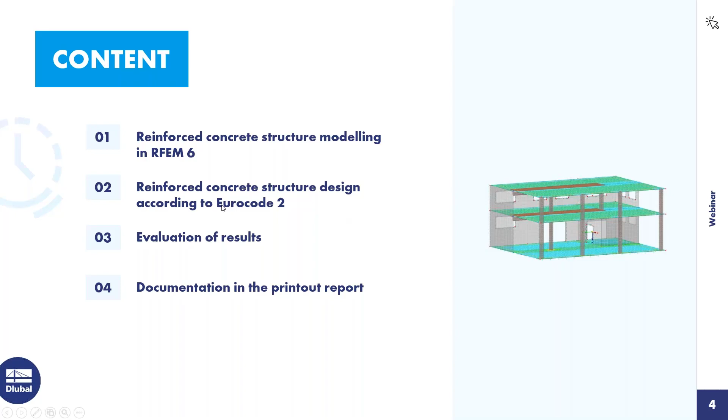The reinforced concrete structures are designed according to the Eurocode. I will design also a T-section here under the slab. Then I will evaluate the results. I will discuss the results, will show how we can work with the graphical displaying of the results, and also how we can print the results into the printout report and document our calculation. I go now directly into the RFEM structure.

The structure was already defined from the members and the slabs. I only give you a short overview about the used objects. The basics of the reinforced concrete design, and also the design of members, the reinforcement, definition of members, also the design by using the member representatives if we have more similar members, was shown in the first webinar for reinforced concrete structures in November of last year. There the basic steps are shown, how you can define the properties and the settings, and my colleague Caroline will write the link into the chat where you can find this webinar. It is very good for the beginning.

So therefore, I will go today in the design especially to things which weren't shown in the first webinar. The punching design was not so detailed, and also not the rib design. The structure is a concrete structure with C30/37, and I use sections for the columns with 450 by 450 millimeters, and I have already prepared a section for the T-section, which is named in our program as rib. In the following description, I will always use the name rib for the T-section.

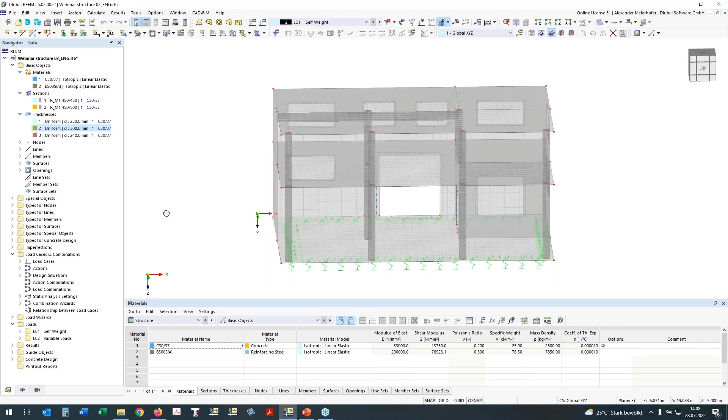The building now has elastic springs, so elastic support, and this will also have an influence later in the settings for the deflection design, which I will show you.

At first, I want to deal with the nodes where we have the connection between the columns and the slab. Here we should place mesh refinements to have a better FE mesh. For this, I go to the data navigator, where by double click I can open a new nodal mesh refinement, and give my settings: radius 1 meter, and the inner target FE length is 15 centimeters. It comes from the dimension of the cross section of the columns.

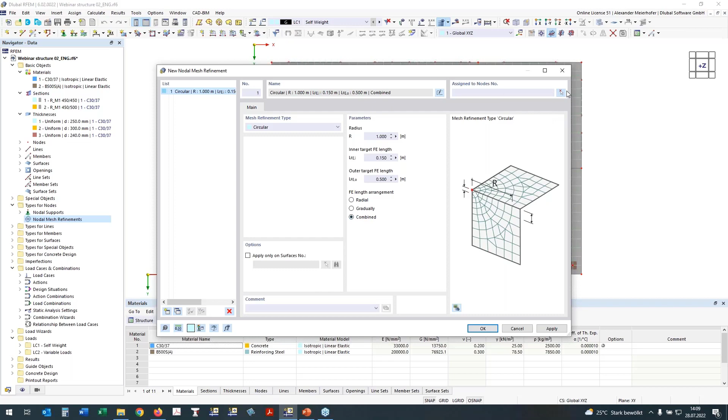For the length arrangement, I use the combined approach, and now I will assign the nodes with two rectangles where I want to have the refinement. And if we look in the isometric view, we will see I have caught them, and everywhere is now my mesh refinement.

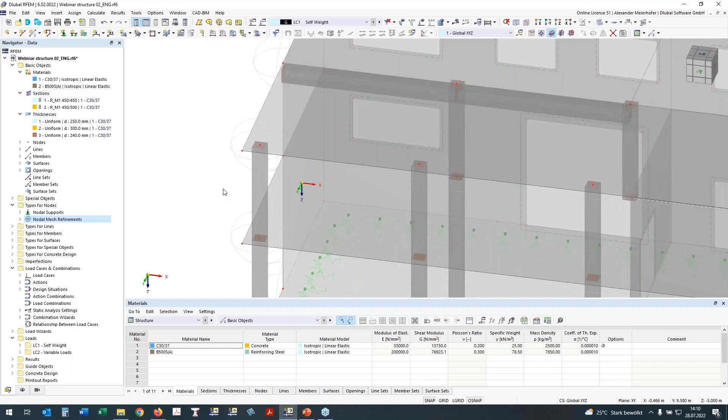On these nodes, from the column and the slab, we also have singularities, and how we can deal with these singularities in the concrete design is described in a very good knowledge base article on our website, which I want to

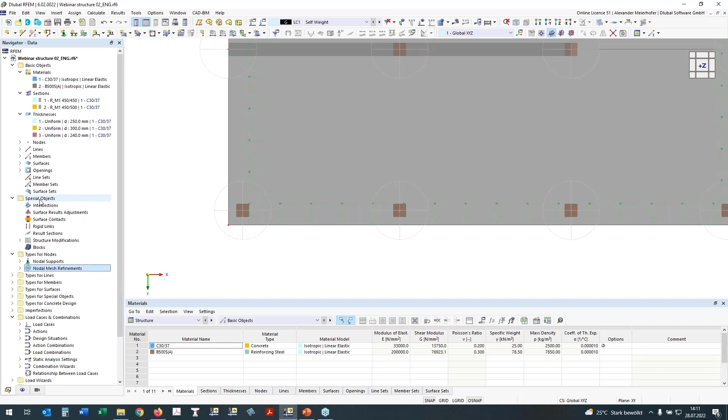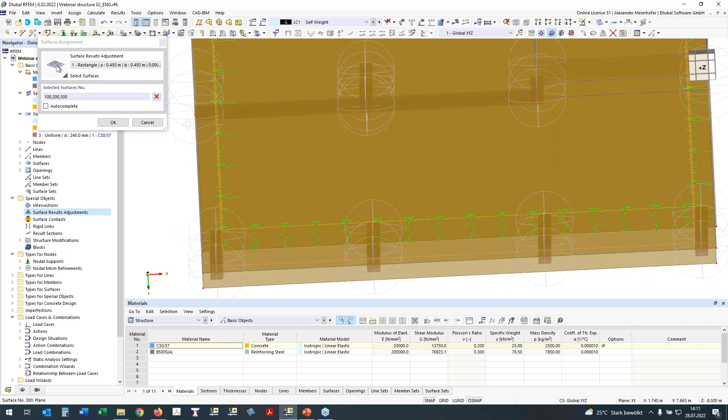By double click, I can open the dialog, and now we can define a new rectangle result adjustment with the dimension of our columns. I want to have it on all 3 surfaces, and you see the numbers of my surfaces were chosen so that I know where they are placed. So 100 is the slab on grade, 200 the slab over the ground floor, and 300 is the slab over the first floor. If I press OK, I have already assigned the surfaces,

and now I have to define the center of my adjustment. Here by copy, I can simply copy this adjustment and set only the new center of the result adjustments, and then I will have it in all areas.

I make one new and want to define it also over the wall. The width is 25 centimeters, and I defined a little bit bigger area and defined it here because here is a wall. Define it also in this area.

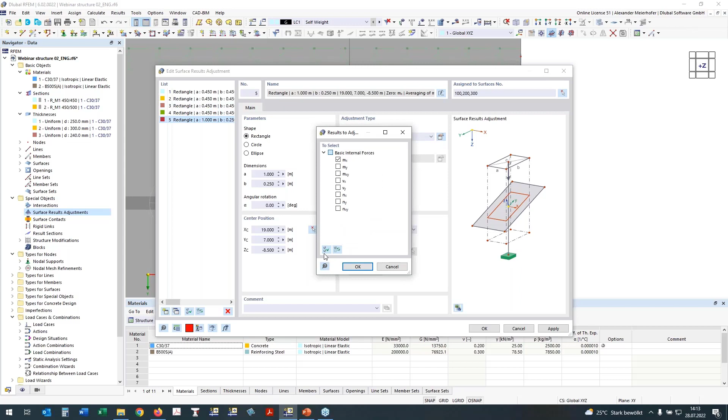I made one mistake. I forgot to define the adjustment type. I want to set it to 0, and I want to set all inner forces to 0, and this should be done for all defined adjustments. So I was one step too fast before. This should be done before I copy it, and then it is always in the right setting. By OK, it will be placed.

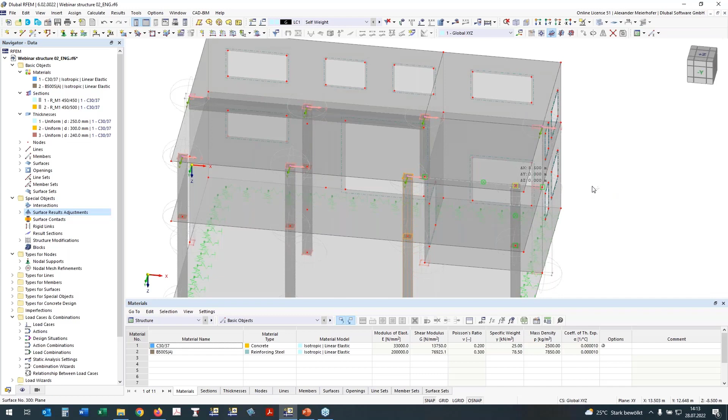We can see it, and we can also work here by drag and drop. We copy it by drag and drop. If we press the Control key, you can place it by drag and drop, and it's very simple to work with. So this is then for the connection of the columns to the slab.

One additional setting for the slab is necessary. I want to have hinges over the length of the supported line. The definition is very simple. We double click on the surfaces, and the edit surface dialog will open. Activate hinges, and in hinges I click to select lines, press Control, and then I have selected 3 lines where I want to have hinges, and the hinge type is by default already the moment hinge, and I will put it to all lines, line hinge number 1.

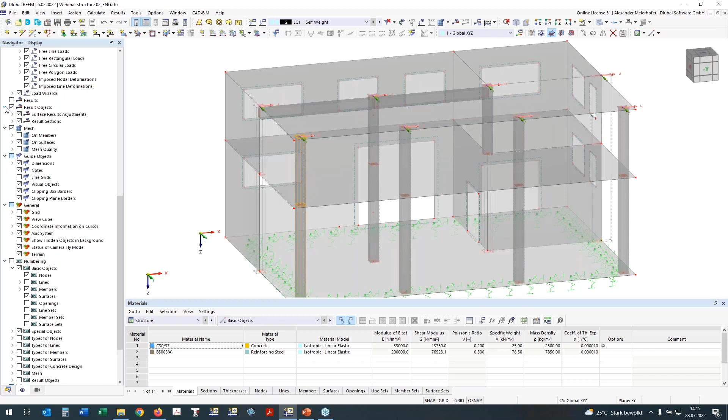Okay, it's ready now, and if we take a look at our refinement, it is placed everywhere, and also the adjustment. In the display navigator, we can deactivate the mesh refinements because I don't need them anymore for the work now, and the graphic is then clearer for the presentation. Display properties are placed now under the results objects, and then it's also deactivated.

As the next step, I will define the rib for the slab over the ground floor. For this, I will hide the first floor by selection, and now I have the first floor.

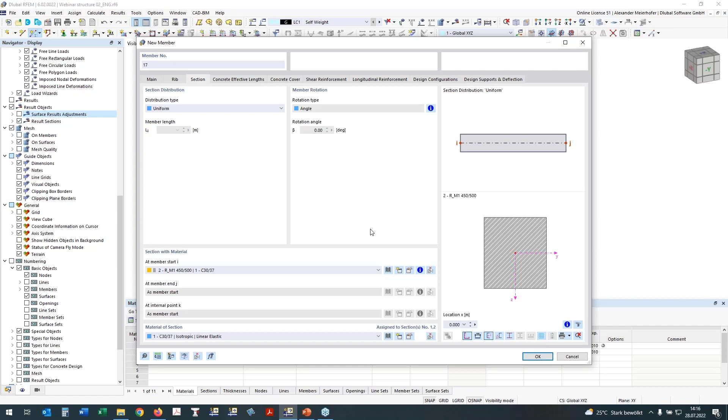By using new member, I can define now section rib by selection of the section number 2, which should be used for the web. The web should be 500 millimeter high. I can define now the rib from here to here, and also from here to here.

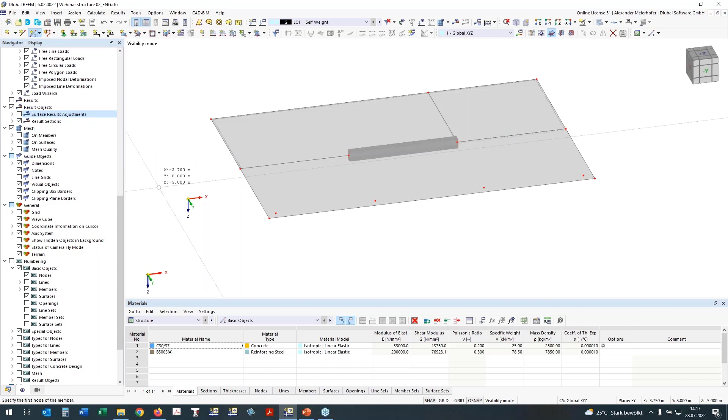Oh, something was wrong. Okay, I do it again. I know what was the topic. I will make the selection new and select only the slab which I want to show. So the new member is the same section, section number 2, and then from here to here. By escape, I come to another point.

So if we take a look to the complete view, we see here in the first part, I took care about the rib. I go now in the rib section, and this is a very new feature that we can now also define more sections or segments during one length of the members. This is completely new developed. I use here the calculation of the integration width according to Eurocode 2, and the splitting of the segments can be done in 15% and 85% and also 100%. And we see now we have more integration points.

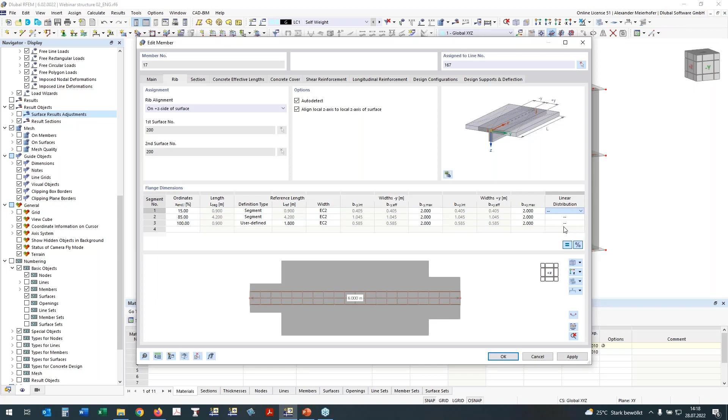Here we have an inner support, and it means we have to consider also for the calculation of the integration width the length of the neighbored span length. So I have to define here 180, and I have now my different integration width. We have here also a new option that we can make here a linear distribution of the integration width, and now we have defined the rib for the design.

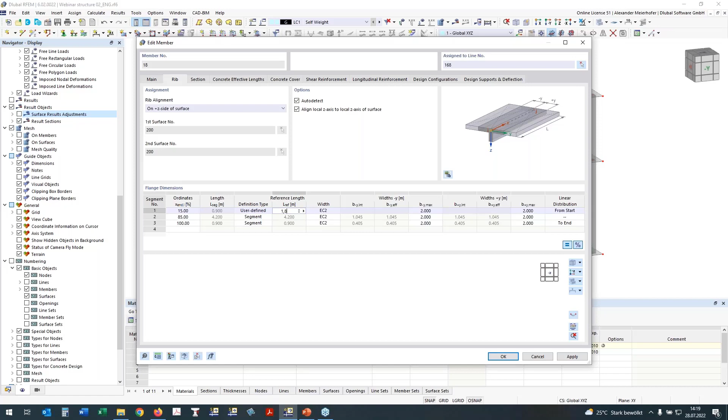For the second member, I use here the copy of object selections. It's a very nice tool. If I click here, we have here really copied all inputs. It's a rib, and the only thing which I have to change is now that the end field is related to the segment, and this is for the user-defined 1.80. And then the inputs for the static analysis are ready. And now I do it again what I did before.

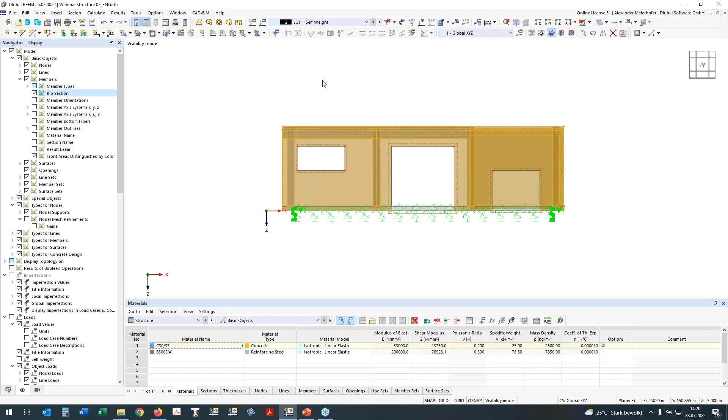And a very nice feature from RFEM 6 is now that we can show the rib section also in the graphic, and we see that the integration width is also shown here in our main graphic of RFEM. Okay, now I will select again my slab here, and will continue with the definition of the design properties.

The design properties for the reinforced concrete calculation are activated by double click. I come into the surface dialog, and I continue with the concrete cover. The concrete exposure durability is defined by the exposure class, which is default to XC1. This is what I leave. It's okay. The design direction of the reinforcement is the first direction goes in X. This is also default, which I will not change.

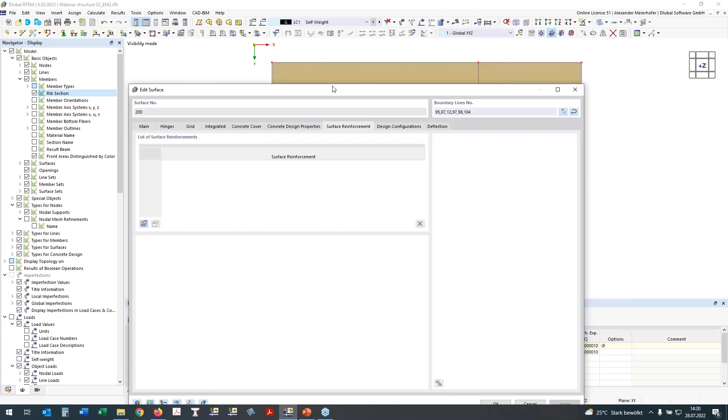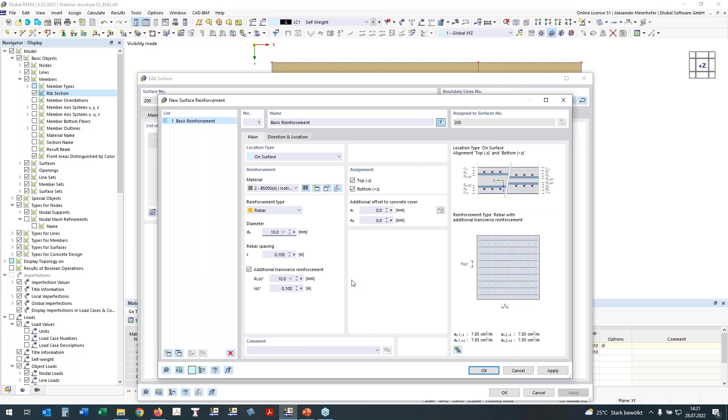And here is one important topic. In the surface, I need a surface reinforcement for the diameters so that I will know the statical depth for the calculation. I just design a type of basic reinforcement, which will be in both directions, the diameter 10 with a distance also 10 centimeters, and by pressing OK it will be then assigned to the surface. Here are listed design configurations, which I don't discuss today. This was in the first webinar very detailed. I will later take a look to the serviceability configuration.

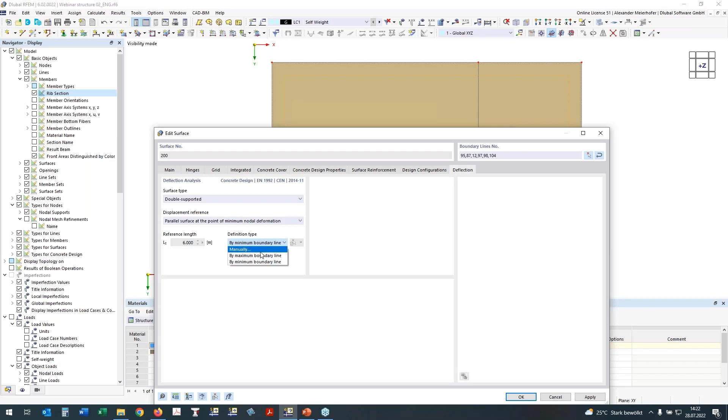But here's one very important thing, which I mentioned before at the beginning. We have an elastic supported structure. Therefore, it is an advantage to relate the deflection to an also deformed slab or plane. And here I use the parallel moved slab as a reference plane for the deformation, and as reference length I will define it manually by 2 points and say my reference length for the maximum allowed deflection is from here to here. It's about 5.5 meters. By OK, I have defined all properties for the reinforcement design.

We can also take a look to the graphic. If we go to the types of concrete, we see here we have surface reinforcement longitudinal, and if we activate it, we see that the reinforcement is defined in this area.

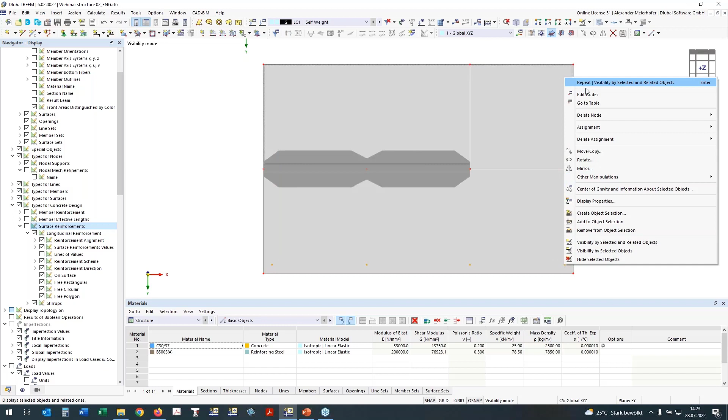Okay, I said that I will take care about the punching design of the nodes which are here. So like for all objects, we have to select it and go into the nodes or object dialog, edit nodes, and activate the design properties. Here it's only important for now that we have to check for design of the punching, and then we will have here also assigned the punching in the add-on concrete.

I will go now to the definition of the ribs. Here we need also reinforcement. I want to design not two members, I want to design it with a set of members. So I select both by pressing the Control key, and create a new set of members.

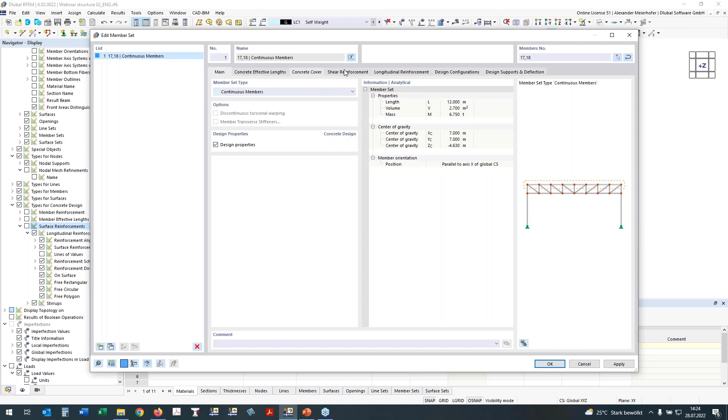And here we have now the new set of members, and I can say design properties for this set of members. We see that all inputs for the design properties are now open. It means the concrete cover is now shown, and here we have also the same durability which we already used for the slab, XC1, and the shear reinforcement.

I will change the distance to 50 centimeters, and if we take a look in another view, then we see here the cross sections, or the variable cross section of the rib, is already shown here, and also there is the reinforcement. I will go to the longitudinal reinforcement. We see here the reinforcement which we have defined for the slab design is already placed.

If we go more, we will see it. It is activated by this icon. If somebody doesn't want it, you can deactivate it or let it. I want it, so I will let it here. But I will define now a different distribution of the longitudinal reinforcement.

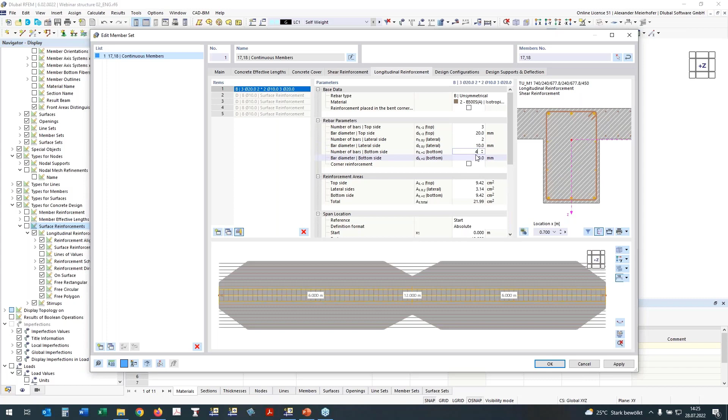I want to have it unsymmetrical here in the web. So on the top side I will define here these three rebars with diameter 20, but a lateral reinforcement also from 2 diameter 10. And on the bottom side, I want to have 4 diameter 20. And it will be directly updated here in the graphic.

Here is also the 3D graphic of the reinforcement, which can be used for control of the inputs. Hopefully it will be shown. Here we see a small reinforcement drawing, also the used shear reinforcement, which can be activated or deactivated. It's nice for control and for printing. Okay, I can close it.

Design configuration is the same like for surfaces in all parts. And now is one important tab. We have to define now the deflection properties or conditions.

I want to check it only in the deflection in Z direction for the gravity loads, of course. And here is the point: my reference is then the deformed segment ends. This is now also the point which I mentioned.

We have an elastically supported structure, so it means also the supported ends will be a little bit displaced in Z, and this I don't want to have in the design check for the deflection.

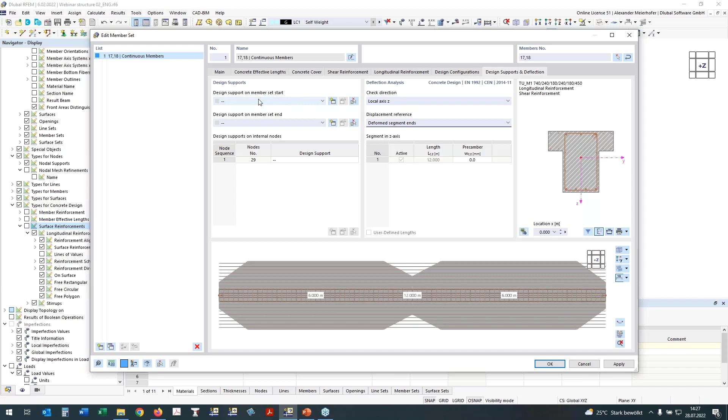Important is that I generate on the ends or in the middle some design supports. We have here design supports in Z direction, and our wall is 250 millimeters. It's a monolithic connection, and will be used for the walls at the end and the start.

I directly copy it and use here also the width for the columns, which are inner supports, and here I have to deactivate inner supports and press OK, and then it will be placed directly at the beginning.

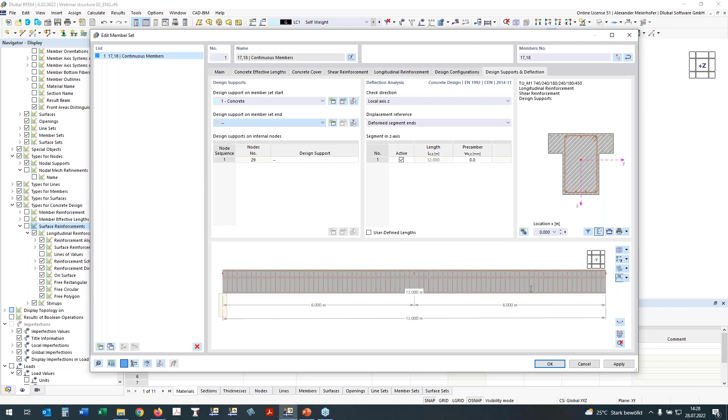I will change here the view to see it. Here we have the first one, and at the end it will be also placed, with the 250 millimeters width. And in the center I will also use the design support, but it is now for the column, and it's bigger, it's 450 millimeters.

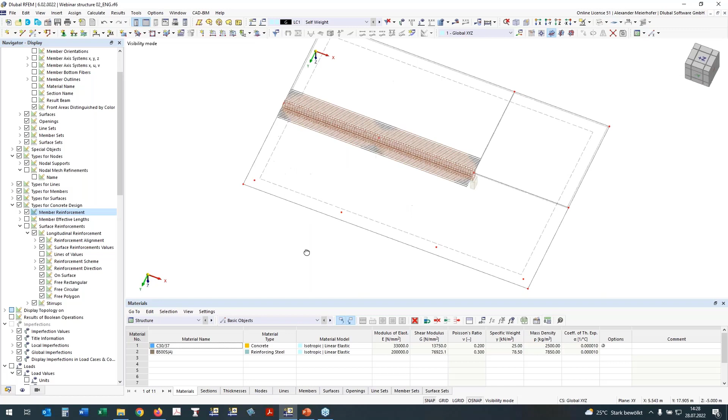And we see here now for deflection we have some lengths, 6 meters and 6 meters, and if we have some pre-camber we could define it here, but in this case I don't have it. Okay, we can confirm the inputs, and also we can check the member reinforcement and display it, and see that everything is okay.

Before I start with the calculation, I will make now new object selections. I have to make it a little bit bigger. Create new object selection, and the advantage of this object selection you will see immediately after closing the dialog.

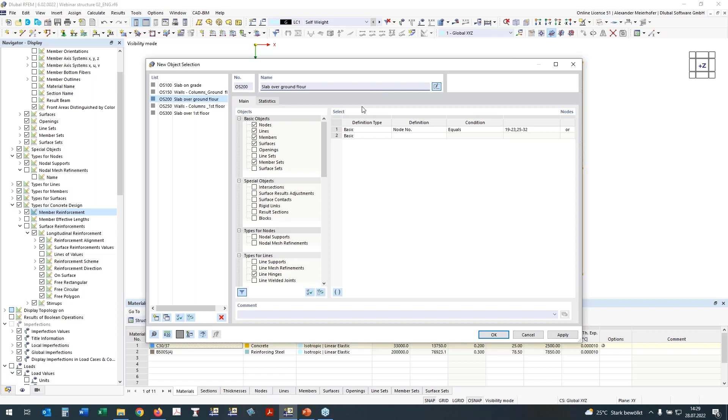This is my slab over the ground floor, and I press OK. And now we have here in the guide objects, the object selections, and you see I have already done a little bit more, but the new one is the object selection number 200.

And if I go now to the concrete add-on, I can use the object selections directly to define all objects which are there in the add-on. It is then replaced, and only the selected object is shown, and it is very good to organize the work.

Before I start the concrete design, one hint where you have to check in the basic settings: you have to activate the concrete add-on in the design add-ons, and in the standards you have to define the used standard for reinforced concrete design.

Here I will use Eurocode 2 with the original rules, so without national annexes.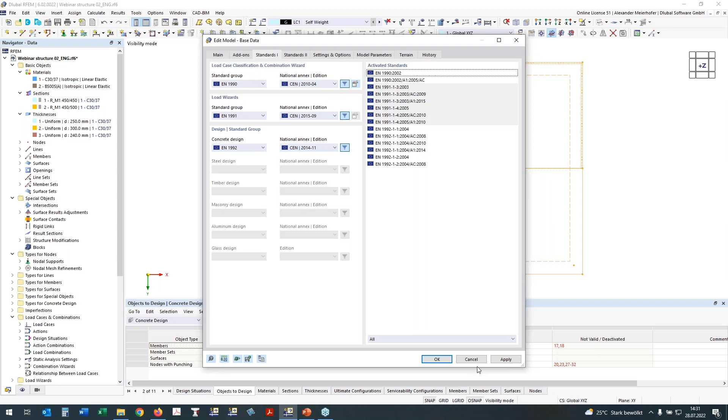If we have the loads, this is also one additional hint. I have defined a load case, self-weight and variable loads. We have to define the action category there - it's for the office. And in the base data, I have the combination group and the combination wizard defined.

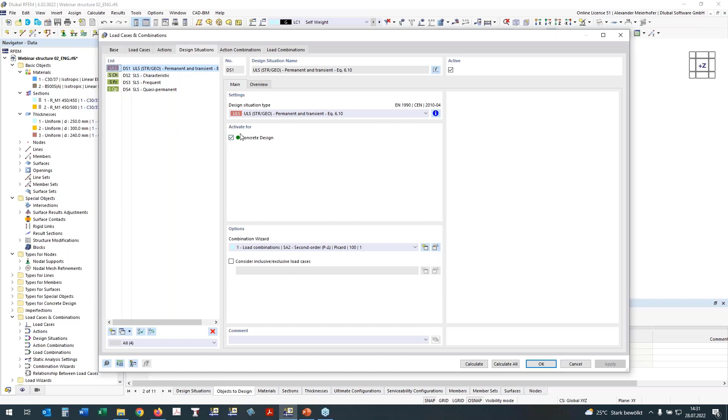In the design situation will be automatically listed the serviceability and ultimate limit state design situations, and here will be the list of all activated design add-ons. Here we work only for concrete design, so all load cases related to this design situation will be calculated.

I can multi-select it, and what I have to do is select my combination wizard. The combination wizard is defined in this way that we have to generate load combinations, and the static analysis should be done by first order and geometrically linear.

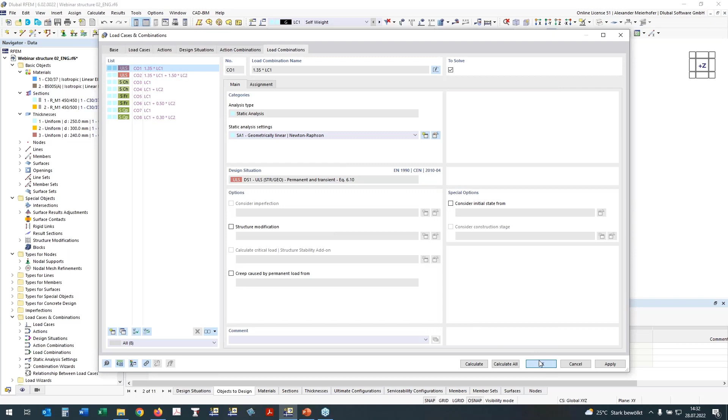If we go to the register load combination, this combination was generated automatically and will also be used in the design of the reinforcement.

Now I go back to the add-on concrete. We have here already designed the object selections. Material and sections are only listed for control. Here are the ultimate configurations or settings which should be used for the ultimate limit state.

Here we have the serviceability state. I will take a look in the serviceability state configuration, and here we have the stress check and the crack analysis, which should be done by finding automatically the limit value for the crack width, according to the defined exposure class. We have XC1, so therefore I expect in the calculation 0.4.

With the deflection calculation, we have this L, the reference length, divided by 250. And here is the crack state detection for the serviceability.

This I want to explain a little bit more, because this is really new, which we released two weeks ago, so I'll take a little more time for it.

The first one is the crack state calculation for each associated load. Each load case or load combination will be considered and calculated for itself.

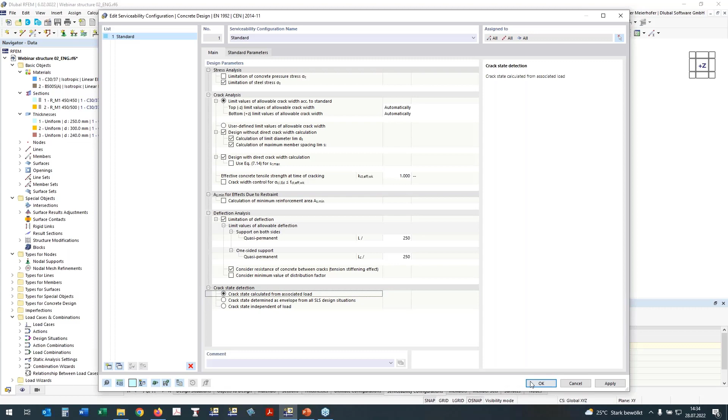I'll add it in the first setting and confirm it. Now I think we can start already the calculation.

Of the statically analyzed design - firstly the mesh will be generated, and as next step the static analysis is done. You see here we can now use more cores of the PC. I have here 4 cores, and there will be 4 calculations parallel. It is very fast.

In the concrete calculation will be done now a pre-calculation of the stiffness, checking if there are cracks or not. Then will be done a second step of finite element calculation, and the deflection will be calculated, and in the last part of the concrete design the cross sections will be designed, and the results will be prepared for display, for the table, and also for the graphic.

Okay, so now we have an overview of what is fulfilled and what not. We have very detailed tables - this work with tables is also shown in the first webinar. Today I want to work more with the graphics.

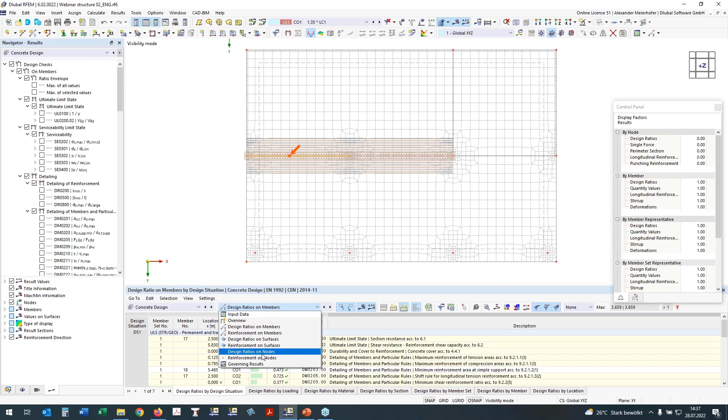The design ratios, one thing more, are also differentiated or sorted by members, by surfaces, and by nodes. Design ratio for nodes is also new - this is the design ratio for the punching proofs, and we see here it's not fulfilled.

I will go now to the graphical results, and firstly we took a look at the results of the surface, and we have here the result values. I want to activate it as only extreme values, and here we have the panel.

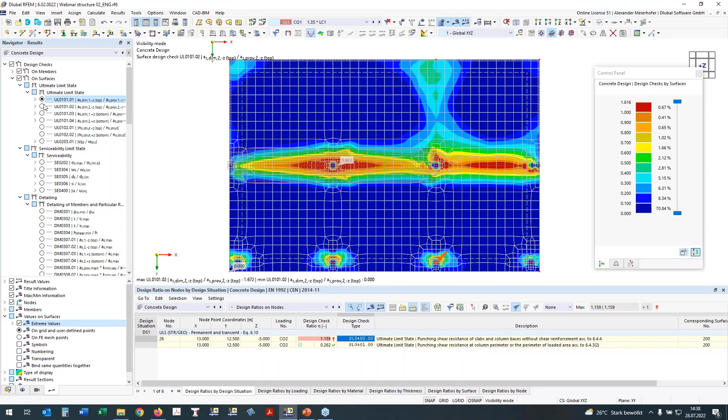So here's a ratio of the defined reinforcement, the ratio between the provided and the needed reinforcement. Here we see in the red areas less reinforcement defined. On the top side, here is also a punching problem. I would expect more reinforcement for the punching design.

If you take a look at the bottom reinforcement in the first direction, we have everything in the green area. The maximum ratio is on this small part, but the main area is under 1. The second direction, on the bottom reinforcement direction 2, is also okay. We have here a ratio of 93%.

The punching proof of these nodes is now shown in the register in the tree for nodes. And if we activate here the vEd for nodes and for vRd,c, we see the corner columns can be designed, but the columns in the center are overloaded, and we need more reinforcement.

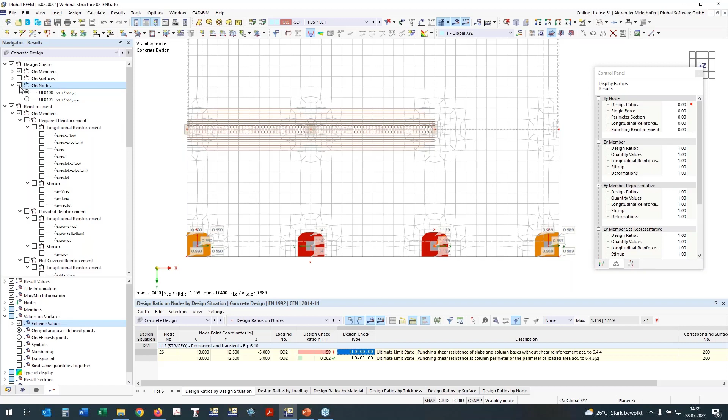To work with it, I will go now to the reinforcement and take a look also at the nodes, and show if we need a required punching reinforcement. Here we see for the required punching reinforcement, we need 0, but we need then longitudinal reinforcement.

In the configuration, I said please calculate the required longitudinal reinforcement to avoid shear reinforcement. And we see if we would place 12 or 13 centimeters, everything would be nice.

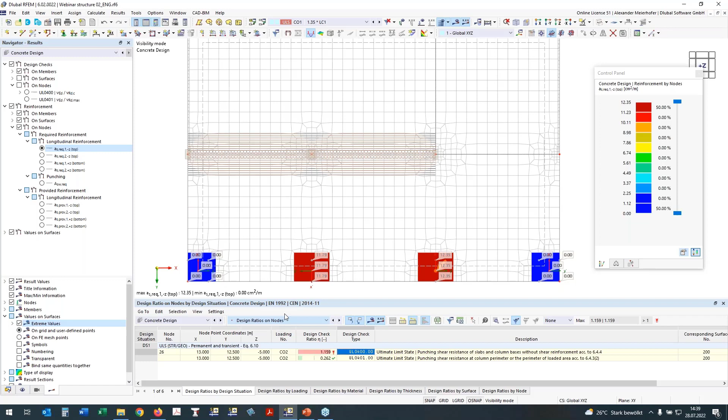I will now define the missing reinforcement. For this, I will go to the global settings of my module add-on. I will deactivate the deletion of my add-on results if I change the reinforcement. Now I can work in the inputs. I deactivate also the mesh so that I have a nice view.

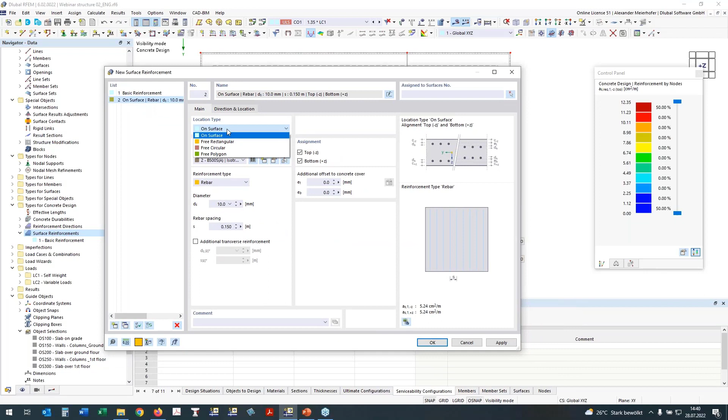And go now in the data navigator to my types for concrete. For types for concrete, we have the surface reinforcement. With new surface reinforcement, I generate a new one, which is a free rectangle area. I assign it to my surface number 2, and the missing area here is for punching, about...

7.8, and I want to have it also only on the top direction. Here is the area which I want to define. I activate my grid to have good coordinates, so I have a grid of 25 centimeters, and this area is already defined.

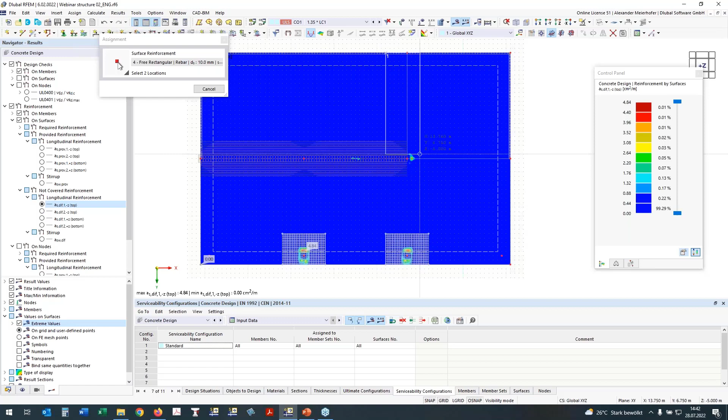For this, I copy the existing one and go in the result navigator, so we can activate the graphic for what we want for surfaces, and say the surfaces have a not covered reinforcement on the top side in this direction. If we take a look here, I will define the same area over my supported line in the first direction, and in the second direction I will do the same area, and take a look what is here. Here I need also some reinforcement, and took it over this length.

It was a little too small, so you can also make it again, and by pressing OK, it is then confirmed, and it is in the structure.

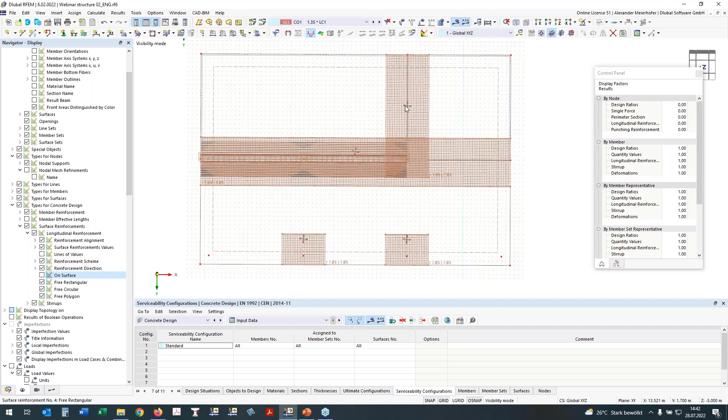For the surface, I can then take a look where is my surface reinforcement. I go to the surface reinforcement and deactivate on surface, and we see what part of reinforcement is defined, and I can also check if the direction is right.

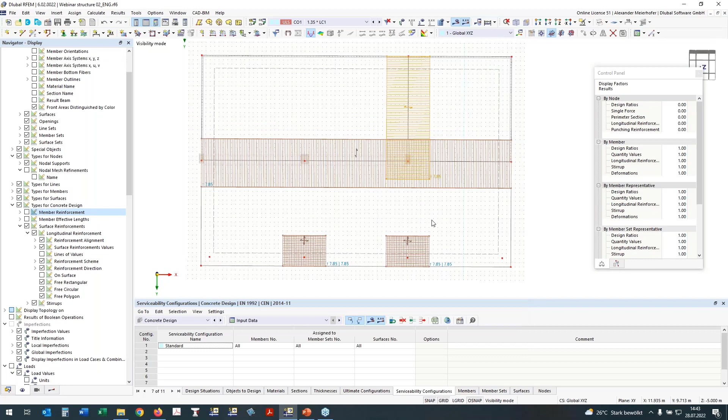Here I have defined one thing too much, so I only want to have one direction, and it's the same here. By OK, we will see I have only one direction. So easy is the definition of this additional reinforcement.

Now I want to take care about the reinforcement in the rib. For this, I select it and change the view, and generate also a new object selection.

which will be then the name should be the T section. Press OK. And here I work now with the design checks on members, and take a look how is my cross-section resistance. We see I'm under 1, so everything is nice.

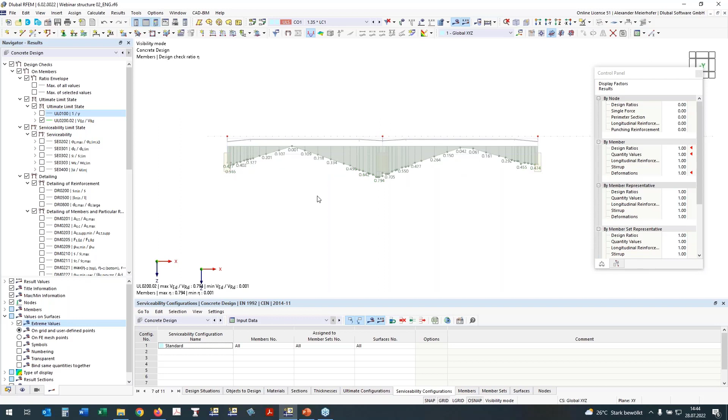If I take a look at the shear reinforcement, the shear proof is also fulfilled, so I need no additional inputs. The serviceability is done in this way, that the stress of the steel is checked.

We can take a look at the crack width, and the crack width is also fulfilled. And now we want to show you the newest release. We have here the additional details in the result navigator. This is available since Monday in the new version, which you can download from the extranet of RFEM 6, and you can activate here also the direct value of the crack width.

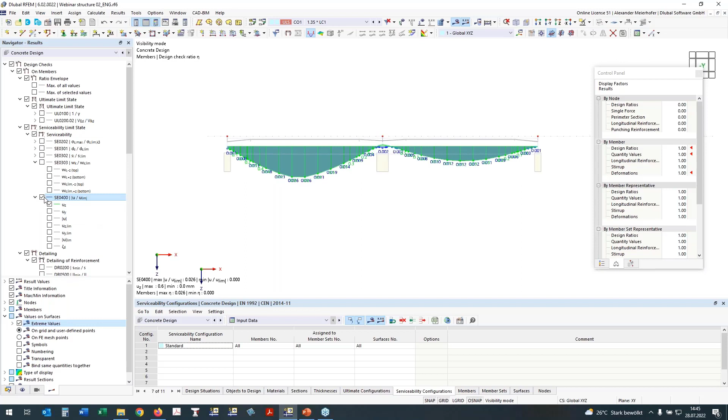For example, we have here only 0.026, and it is also for deflection. The ratio is very small, and the existing deflection is now 0.6, and we see here it is related. Here is the end, it goes to 0, and this comes from the relation to the deformed structure.

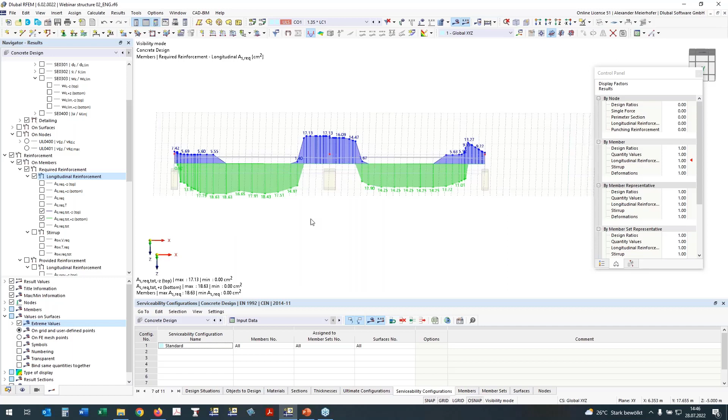Okay, if we take a look at the required reinforcement, it is also here in the table. Required reinforcement of members, As top, As bottom, and we can take a look at it. You have here the graphic, and if we want to print it to the protocol, we have to generate a new protocol, but what we have to consider is that the calculation must, of course, be done again.

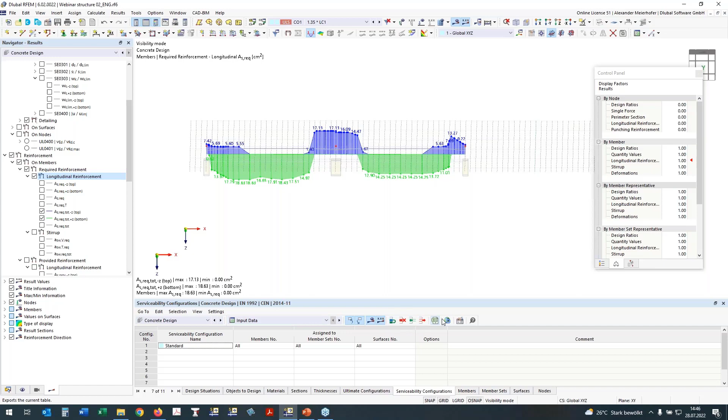We changed the reinforcement. For this, I go to the global settings, activate the deletion of the add-on results, and then it will be updated and deleted. And now I have to start the calculation of the concrete design add-on anew. You can do it also here with this icon and start only the calculation of the add-on. The static analysis results were not deleted because the reinforcement has no influence on them. Now it is only the calculation of the concrete add-on which will be refreshed and done again.

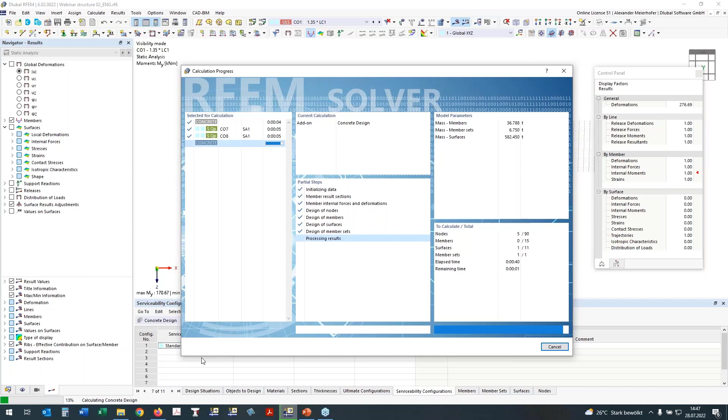And as I said before, this is a two-step calculation. And in the last step, we have here also again a concrete calculation for preparation of the results and the graphic. So now we have the updated results. Design ratio by nodes, by members is okay. And then I will go to the printout report in the navigator and show you how simple it is to work with the printout report.

If we generate a new printout report, I make it here for the concrete results or concrete design and assume that all other documentation of the static analysis will be done separately in another printout report. Today I want to show only the report of the concrete results. So types for members, types for surfaces we don't need, but types for concrete design is necessary for the durability class and the surface reinforcement.

And what I also need is the concrete design, where we have to discuss what is necessary. We see here it is possible to show every tab which is also available in the add-on. It can be printed, but I want to have here only the design ratio by set of members, for nodes and for surfaces. The reinforcement for members should also only be shown by member set, because I design only the member set. The provided reinforcement by member set, the not covered reinforcement I will not show. For the reinforcement by nodes, I leave it as it is, and the design overview will be deactivated.

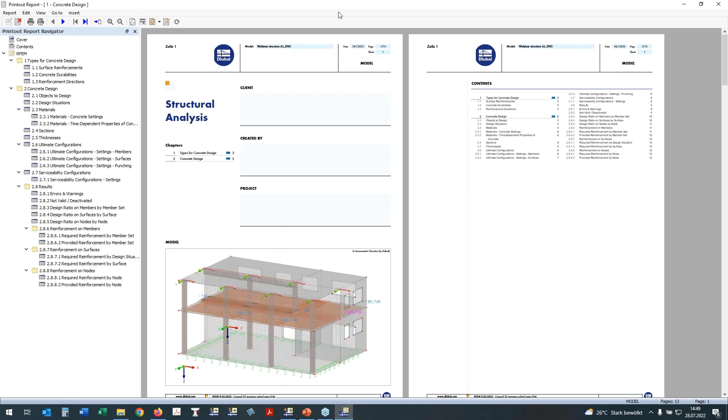By save and show, it will be generated, and the printout report is one of our new developments in RFEM 6. It is completely new. It is a separate instance, which can be used here. It can be opened in parallel to the RFEM calculation, and if we take a look at our results now, result members, then we go through the results of set of members.

Here everything is green; one thing is the crack control, which is overloaded. This we can check later. Detailing is 1.017. It's okay. So from my side, it's okay. For the design ratio of the nodes, the punching design, all ratios are also fulfilled.

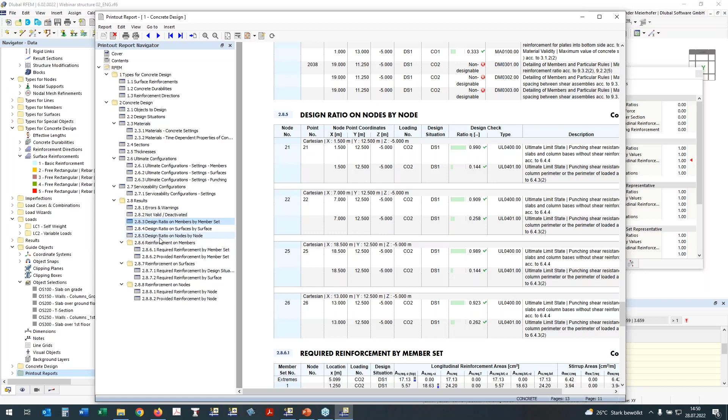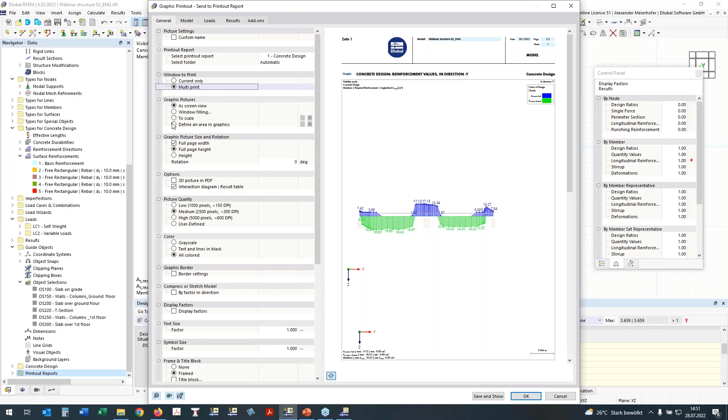And if we go to the required reinforcement by member sets, we will see the list of the required reinforcement. Here I want to show also how we can print the required reinforcement, because in my eyes a picture, a diagram, is better than many tables. Here we can use the printout report, the graphic, and here I want to use the current one. New is also the possibility to define an area in RFEM to print it to the graphic.

Yeah. By 2 points. I will activate the grid. So we can move it, make it a little bit bigger. Okay. And this area will then also be saved and will be used for later.

I make the height a little bit bigger, and the panel should be outside of the graphic, so that it will not be, yes. And with OK, it will be printed to the protocol. If you activate it, you can see it here and make it smaller.

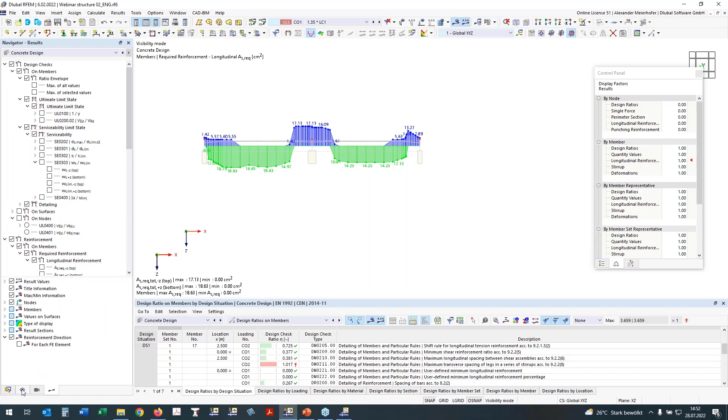Everything is here. And by also using the inputs of the reinforcement, we can now deactivate the design checks on the required reinforcement and activate our member reinforcement longitudinally and use the descriptions. And with descriptions, we can print it directly into the protocol with the same functions.

The same icon will be pressed, so the area is the same. I don't change anything, and with OK, it will be printed. Now I will take care of the slab. For this, I will go to my view navigator, display view navigator, and this is the next advantage of the object selections.

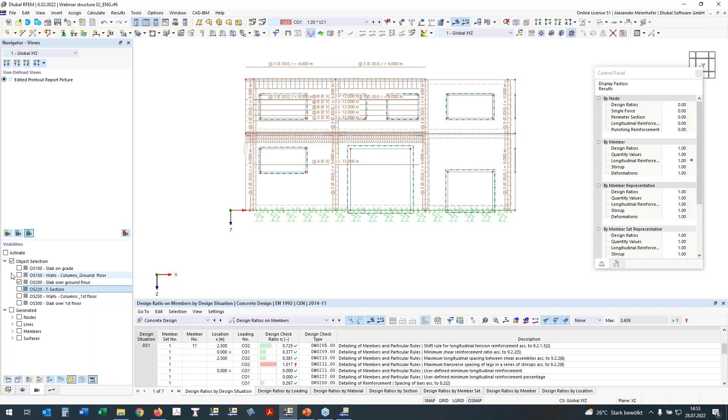If you remember, I have here the slab over the ground floor, and if we look in the Z direction, now everything I selected before is activated, and I can continue with my presentation of the results for the slab. Firstly, I deactivate my member reinforcement, and in the result navigator for the design checks of the surfaces, I go to the ratio of my longitudinal reinforcement on the top side.

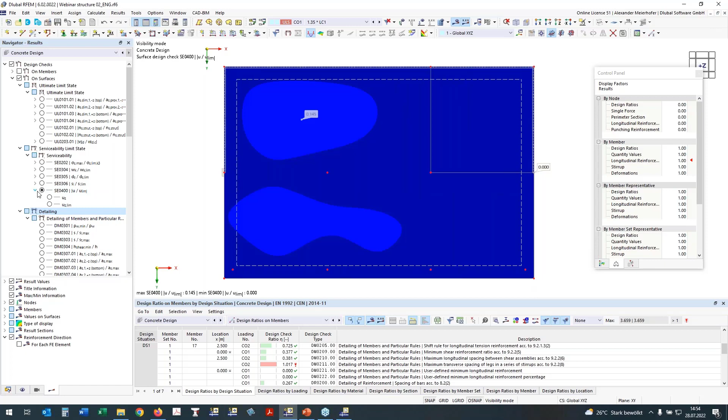It is okay. The bottom was also okay. We take a look at the displacement. So this is a ratio like it is for members, and here is also the deflection. Important for me now is the punching proof, because this was not fulfilled before. We see the ratio is now smaller than one. It's perfect. And we can now also print a documentation of our results.

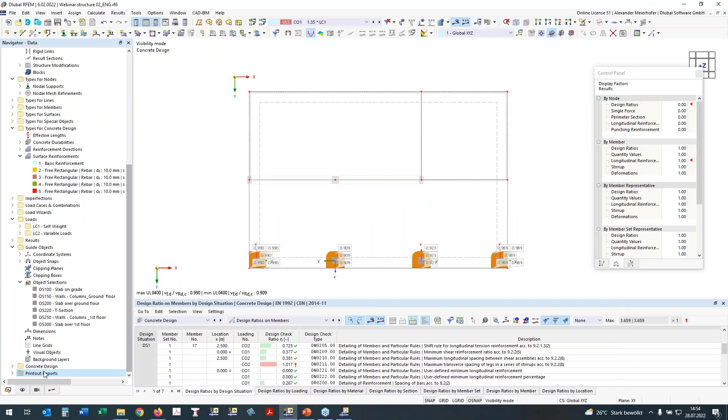I want to use a bigger paper now, like it was done in the documentation. The first printout report is format A4. I want to use a bigger one for the plots. Make a new printout report, and say this is only my annex for plots. And for this, I deactivate all settings here and generate a new page format.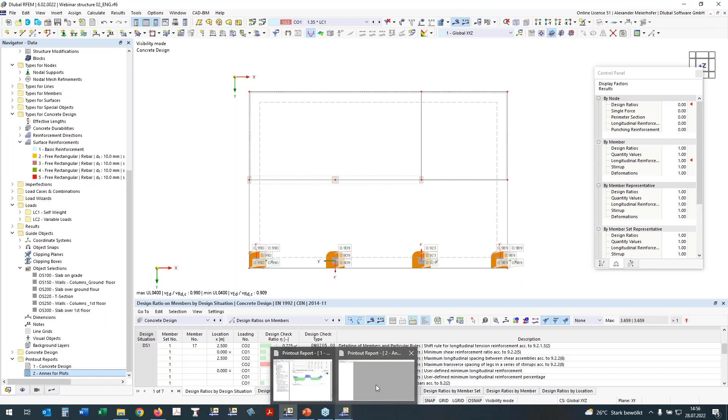For this, I have to select a printer which is able to print bigger pages. So here is my printer, which can print A3, but you need 7 millimeters distance on the bottom side, and I don't need a cover page. With OK, it is saved, and save and show. I will get a new protocol, which is also shown here, but it's empty until now, because I printed no reinforcement or results there.

I want to use the same one again and print the surface here. You see the last view is saved. I want to have a new one. I want to use it in Z, define it in the new area. So from here to here with OK, and with the multi-print, like I did before, I can print all result diagrams which are necessary.

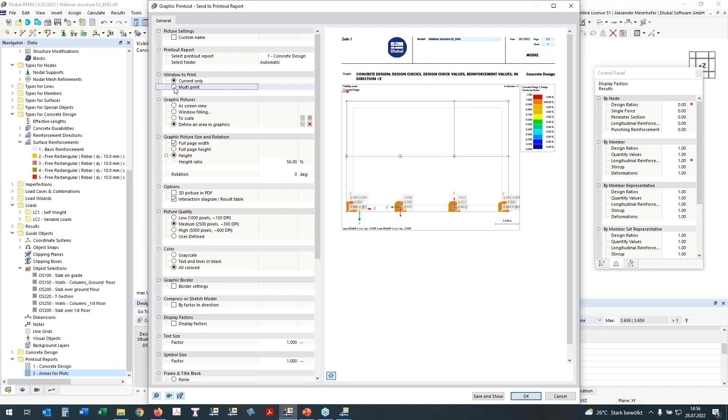Model is not necessary, load cases not here, and in the add-on. And now you see this navigator is really the same as the result navigator in the main program, and we can print all results we want. So here I print first the ratio between the provided and the required reinforcement, then the crack width calculation with top and bottom crack width, then also the deflection design check with the uZ graphic. Detailing I don't show.

I will also show the nodes, the punching nodes, and here is the used shear force, the punching force, which is set in the calculation for RC design. This is a very nice graphic. On each node we then see the value assigned in the calculation. Required reinforcement, of course, I want to have my required reinforcement and also my provided reinforcement shown. For surfaces and for nodes, I need the required reinforcement on the top side, which must be placed to avoid punching reinforcement and to fulfill the punching proof without shear reinforcement.

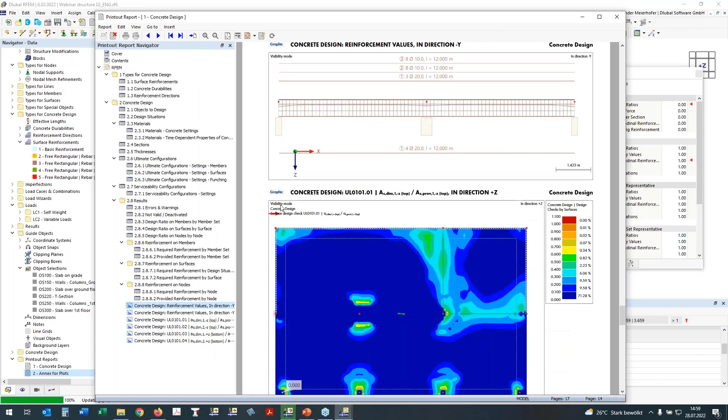It has now started to generate. I have selected, of course, many graphics. It is now being generated here in RFEM, and then we will see it step by step in our printout report. Oh, this was my mistake in the presentation. I selected the wrong one, so let us take a look here. The principle was the same. Let us discuss the result.

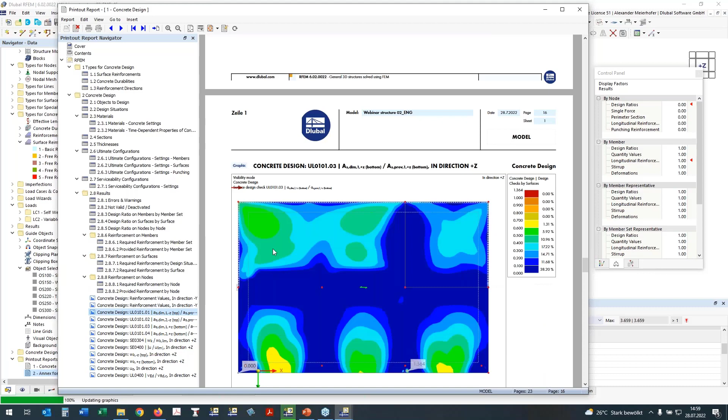It's now in printout report number 1. Here we see the reinforcement. Everything is fulfilled. Also the ratio of the top reinforcement and the bottom reinforcement is okay. Here we have the crack width and the ratio of the deflection, and here also the crack width on the top side and the crack width on the bottom side.

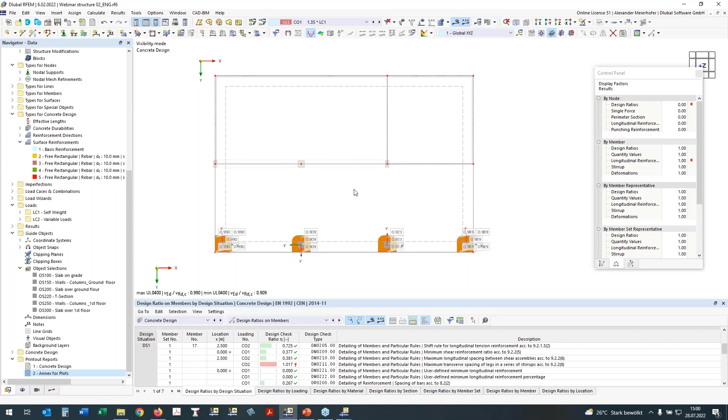Okay, this is then the design of this slab, and we are ready with the design of the member of the T section, and also for the punching nodes. And I want to show you also the punching design of the foundation slab, where it is a special case. Here we need an iteration of the critical perimeter, where is the critical one. It's not 2D, it's iterative. And also to consider the soil stress under the ground slab. And this will be done now automatically.

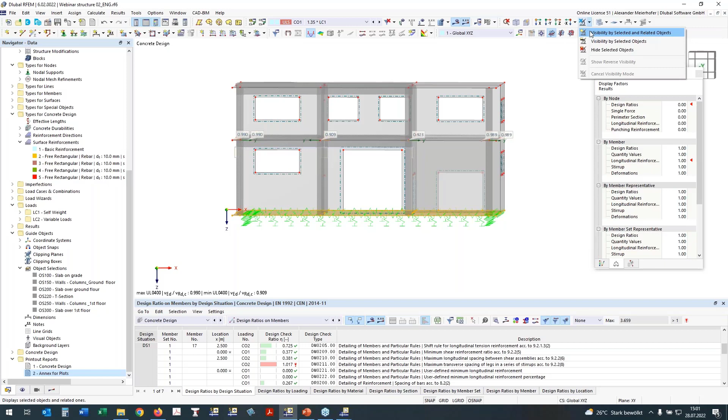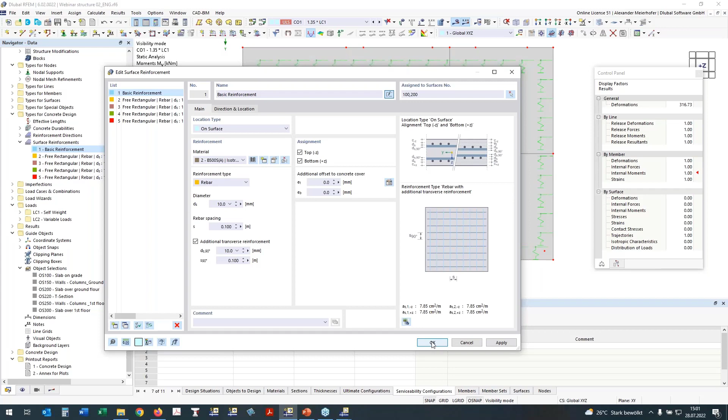I do it in the same way: I select only now our slab, take a view in the Z direction, and the same as I did before in the presentation. I have to go to the node and say it's my punching design. Of course, I have new properties. Now the results will be deleted. Further, I have to define the reinforcement in the slab so that the punching proof can be done. This is very simple in the basic reinforcement. I use here then also the number 100, which I said before. This will be my slab over the ground. Great.

And then we can start the calculation of these points. If we remember, we have here different types of the punching design. We have here a wall end at the border of the edge of a slab. We have here a corner column. We have here a column at the edge, and we have here a wall corner in the center of a slab. And here we have an inner column in the center of a slab. And this will be done automatically in the design.

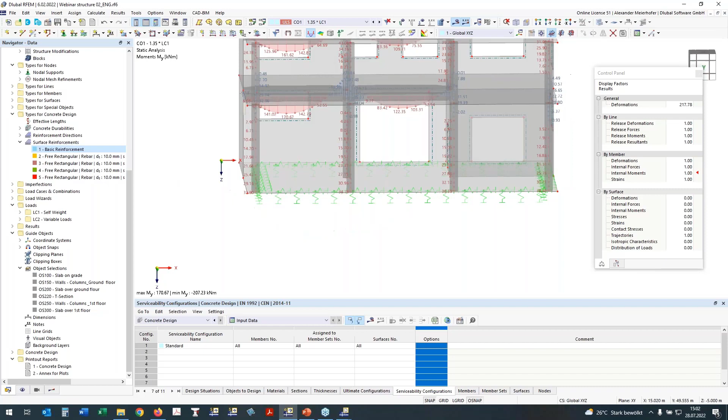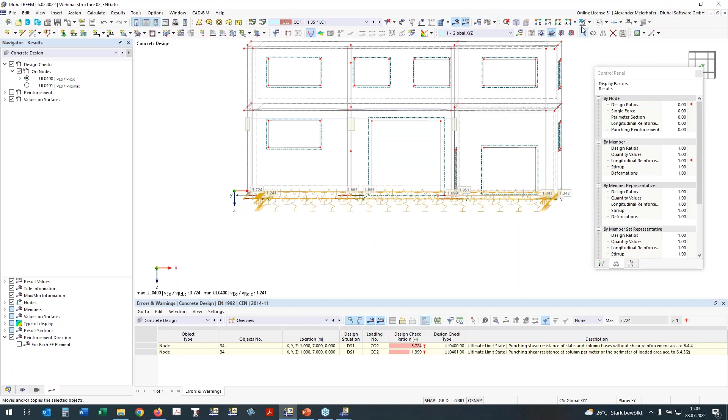I will go to my concrete design. This is now only for presentation, how the iteration will work. For selection, go the same way like before. Say, please design this node for the punching design. Okay. Member sets I don't want, and press OK. And now I will calculate the punching proof for this node on the foundation slab. And I will go to another view, Z direction, it's better.

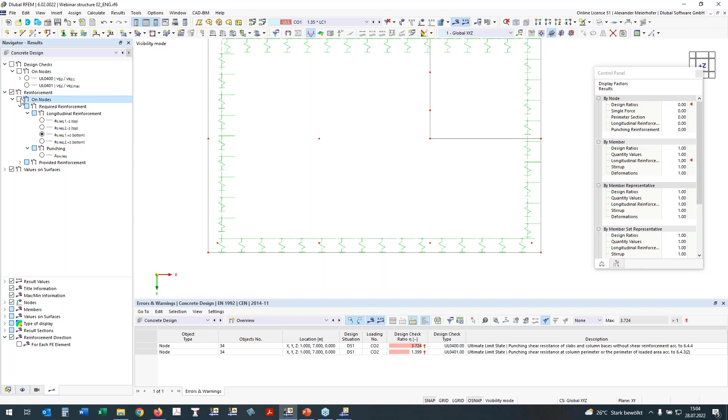And we see that the wall end is found, the geometry is found automatically. It's a wall end. Here we have the columns, and here we have a corner. We see also the result of the iteration of finding the critical section. Here it's a very small distance, and here we go until 2D. This means now that the reinforcement is not enough, like I discussed before. And if we take a look at the required reinforcement of the punching node, we will see if we would need a punching reinforcement or if it could be done by some additional reinforcement. We need no punching reinforcement. We can add additional longitudinal punching reinforcement.

So also the punching design for a foundation slab is now implemented and can be very simply used in your daily work in the design of concrete structures. Okay, this is an additional feature which I want to show at the end of my presentation. I will then finish and close my presentation with the picture of the punching design of the soil slab. Thank you for your attention.